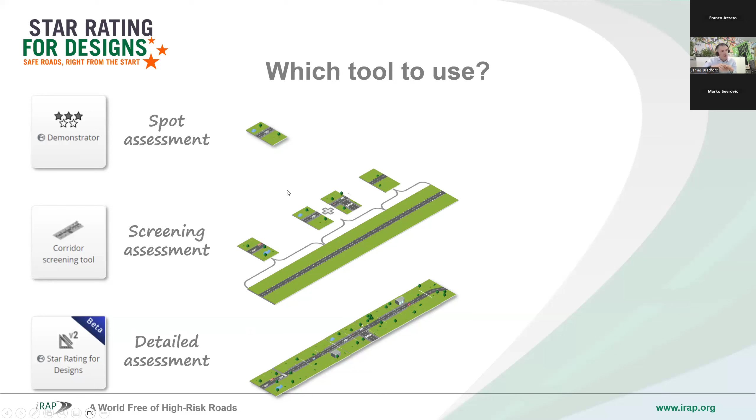It's also worth bearing in mind the level of resolution in the results they provide. The Star Rating for Designs web tool will provide you the full star ratings in detail for every 100 meters, whereas the screening tool or the spot assessment will put them at a broader level. So it'll still give you star ratings, but there'll be a tolerance associated with them.

If you're an advanced user of iRAP, it's fully possible to take an upload file for the before conditions and then generate the changes you're going to make on that, or even build it afresh, all in Excel, and upload that straight to ViDA.

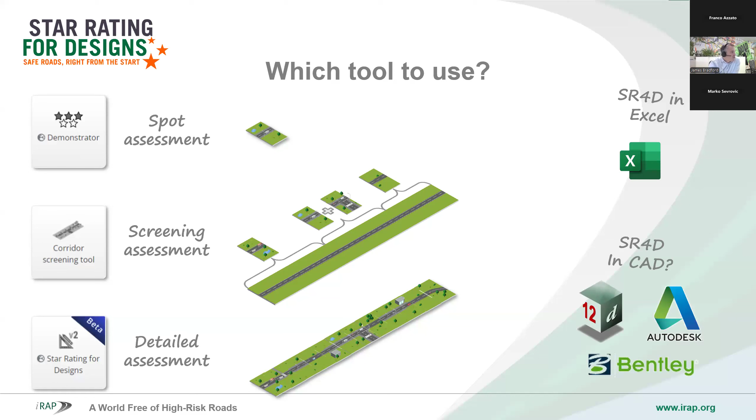And of course, it's worth noting that certainly iRAP, we're working with a number of the core CAD providers for this industry, and working with them to actually try and make sure the Star Rating for Designs is actually built within the CAD software. So as a road designer is going through that, making their choices of how they're going to do their road, it would come back saying, this is what the star rating would be, and this is what your fatality estimation would be.

So let's look at a little bit more detail. For those who are not aware of the Star Rating Demonstrator, it's a tool in ViDA. So as soon as you hit the ViDA dashboard, there's a button there that you can go to it. It allows you to select a starting point if that helps. So you might pick, say, a rural road. You can then look at the road features that have been selected for that rural road and then customize those.

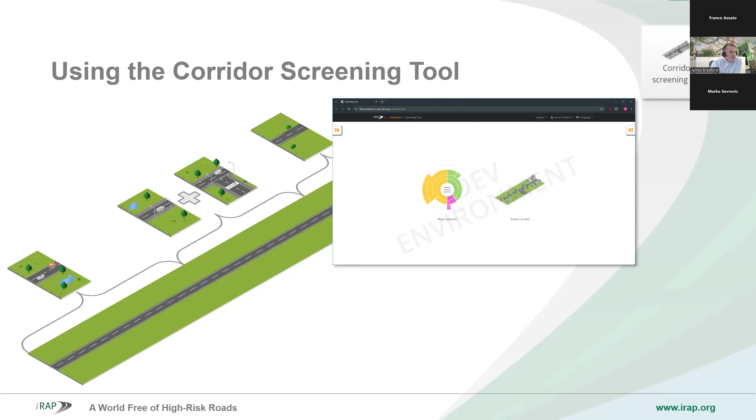So once you open that up, you're allowed to put the information in about your road, so how long it is and what its name is, etc., and what country it's in. It will then create your road. So your road will be going down the page, and then you can put in the subsections of it. So you could pick this first section and say, okay, this is a rural bit, and it's so and so long, and then you can actually define a stereotype. So you'd click on that button there, and it will open up the stereotype, so the coding window for it, and you'll be able to record all of those road features.

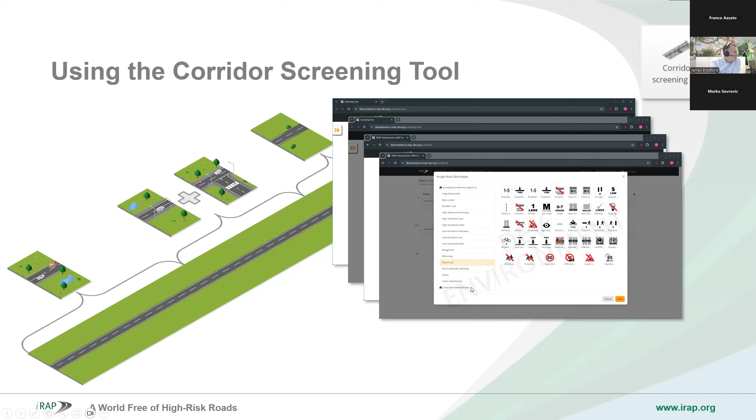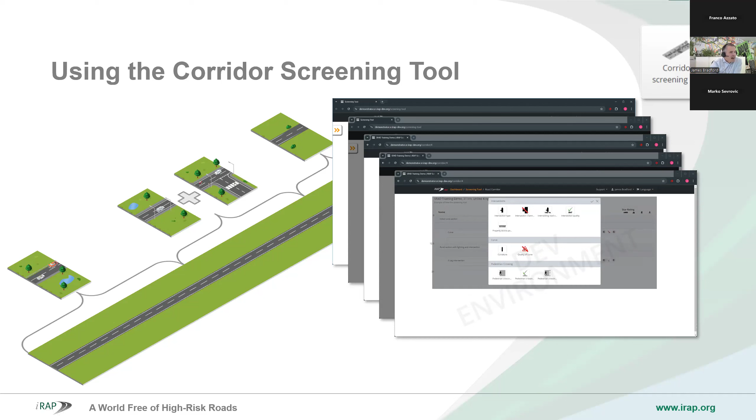Of course, it also allows you to load, if you've previously saved a stereotype or 100 meters in the demonstrator, you can certainly load that up within the screening tool. And what we're aiming to do is build this over time and start incorporating road standards within there. So if you're building it to a certain road standard, you could use that as your starting point. You can then, once you've got all those fixed attributes that are consistent throughout the 100 meters, start building in some of the ones that will vary. So this would be things like intersections. Of course, there won't be an intersection in every 100 meters, curves and property and pedestrian crossings. So you can select for those in there and how frequently they are going to be down the road.

It's like their density. So here you can see I've separated this road into 3 different sections, with this beginning bit being 12 kilometers long, the middle bit being 10 kilometers long with 1 intersection inside it, and then the last bit is 8.5, and it will show you what the road will look like in terms of the star ratings. So this road, I haven't put any pedestrian or bicyclist flow on it, which is why it's just producing that vehicle occupant risk and that motorcycle risk.

The next stage we're also planning to do with this is also put in fatality estimations. So we're just looking at how we can do that. So this is where you can actually stitch multiple hundred meters together to reflect different homogeneous sections.

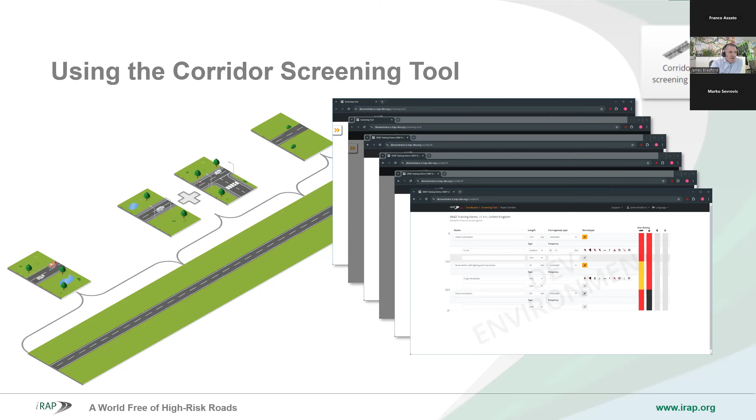And finally, the focus of where we're going to be talking about today is very much on the updated Star Rating for Designs web application. So I'll give you a demonstration of how that can be used and what ways that you could use that. Before we go into that, what I want to do is go through a case study of how Star Rating for Designs, the original web app, had been used already.

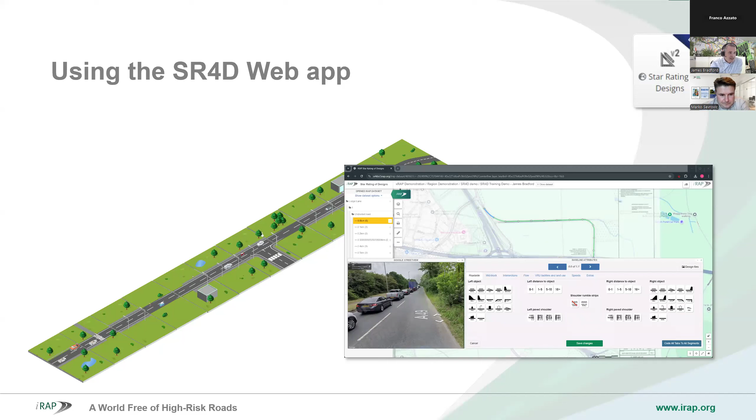So what I'm going to do is pass over to Marko at Era, and he'll talk you through the project they did or they facilitated in Croatia. Perfect. Thank you, James. And I'm requesting remote control for the slides if possible. Yep, you've got it. Yeah, okay.

So I will be talking about one case study of the A8 road, which is a road connecting one major tunnel that we have in Croatia. That was one of the, let's say, most dangerous sections in Croatia. And let me just, sorry, I skipped a slide. So yeah, going back. Perfect.

Okay, so it is a current road that is approximately 12 kilometers in length, and it's a single carriageway, one lane each direction, and it's very heavily used because it connects one of the most prominent areas for tourism in Croatia. And its ADTs in the summer go well above 30,000. So you can imagine with a lot of trucks and everything, there were a lot of crashes, overtaking, even illegal overtakings, and the problems were occurring daily.

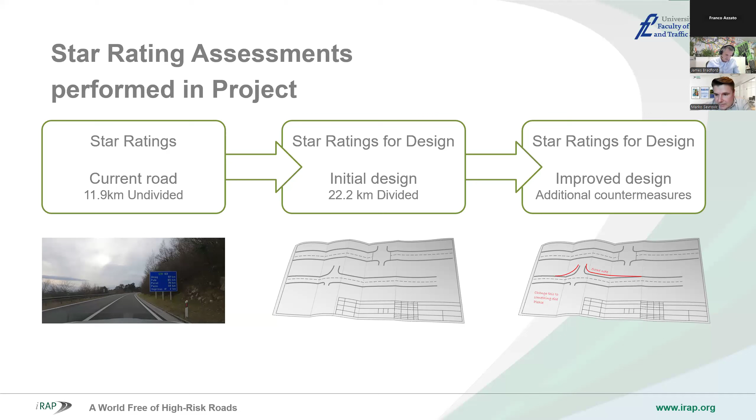So the concessionaire decided to build a second carriageway, of course, having 2 lanes each carriageway, 4 lanes in total. And they did the initial design. And during the road safety audit process, which was mandatory because this is part of the TEN-T network in Croatia, we also implemented the process of star rating for designs and came up with an initial design.

So one of the good things we had here was that we had the iRAP survey before. So that's on the current state, on how the road currently looks. And as you can see here, the danger features of this road really reflect in the star rating. So more than 54% of the road was rated as 1 star only, and another 27% rated as 2 star. So only a small percentage, somewhere around 16%, was above the 3 star benchmark that was set.

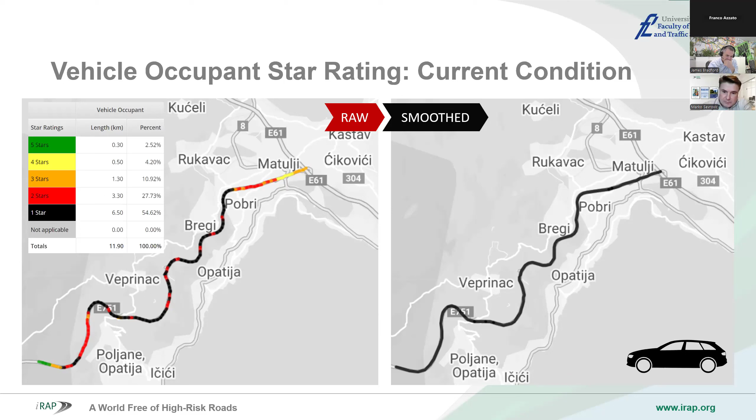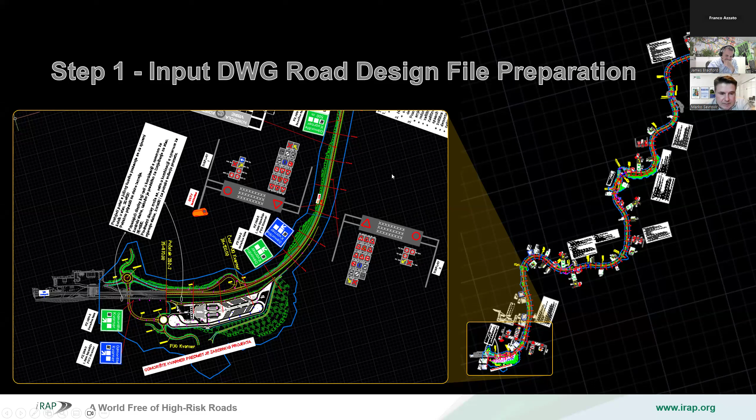And if we look even in the smoothed sections, for those of you who know iRAP, we have the raw and smoothed sections. So the smoothed section actually came up as a 1 star road for the whole section. Having that in mind, we also did the analysis for the motorcycles as well. It's a 1 star, and in the process of the RSA, we got the CAD designs from the designer, which were then assessed in terms of traditional road safety audit, but also with the Star Rating for Designs app.

So how did we do that? As you know, probably some of you are road designers, when you get designs of roads, you get a whole bunch of CAD files which hold different features of the roads. And sometimes what happens is that you don't have a single CAD file that covers all of the aspects of the road that should be assessed in the road safety audit.

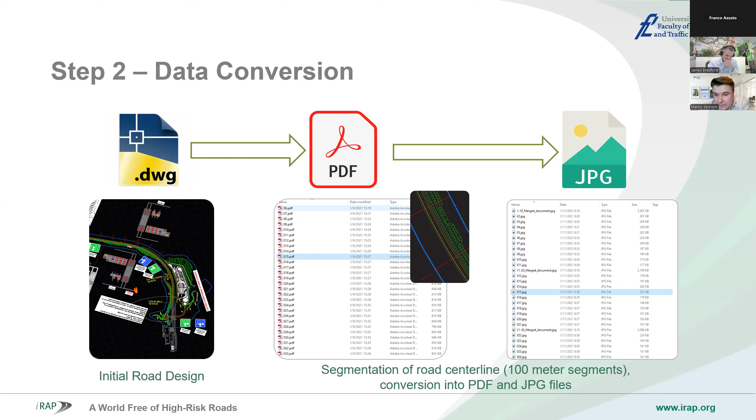So what we did in the first exercise, we actually merged those files together and converted them to PDF and to raster images so that we have the current layout in the raster format. And then these raster formats can easily be uploaded onto the Star Rating for Designs app into respective folders and linked to the center lines that we can later on use to calculate star ratings in ViDA.

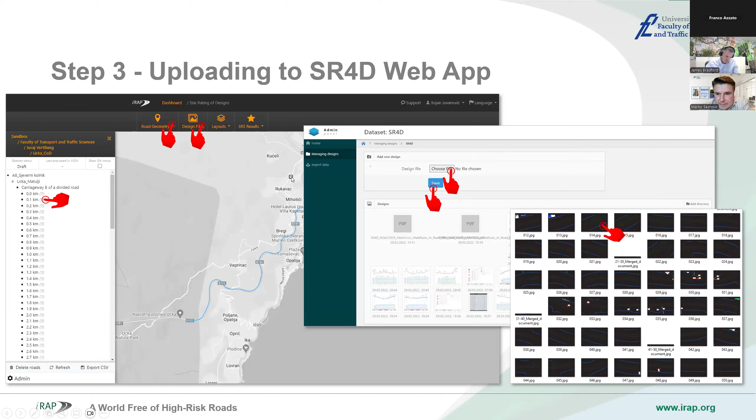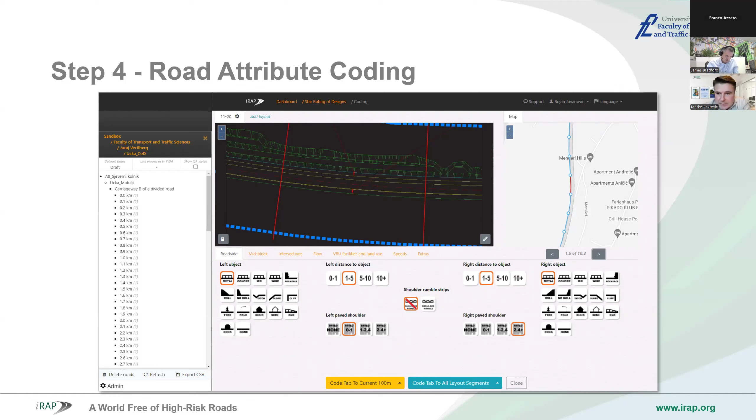Once we have the CAD files, you also link the individual 100-meter sections to a particular location in the CAD file. So the person who is doing the assessment can easily browse through the 100-meter sections, going back and forth, and actually coding the attributes based on the iRAP coding manual and the procedures which are present for calculating the star rating of designs.

So designers usually try to get to the point where they meet all the requirements of the standards, but that does not necessarily mean that the road is absolutely safe. So we can do more than the standards, and that's exactly what we suggested in the following steps.

So the ViDA investment plan came back to us with several recommendations. This is a very hilly terrain. It's very hard to build additional lanes and to fix the curvatures. So we basically selected only the countermeasures that are applicable at the location and tried to do the improvement design based on what we can actually suggest through the RSA process to the designer to amend in the future.

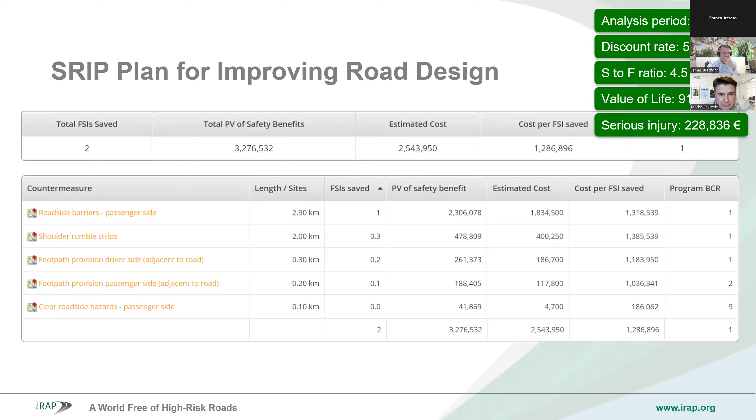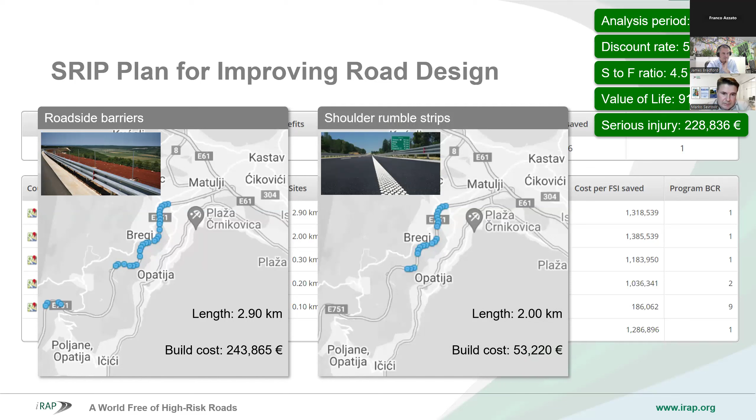And you can see here the screenshot from the Safer Road Investment Plan from ViDA, where we have the recommendations to install 2.9 kilometers of guardrails and other things at the road. So as well as the numbers, as well as the money, we also had the locations where this would actually make an impact in terms of benefits in road safety.

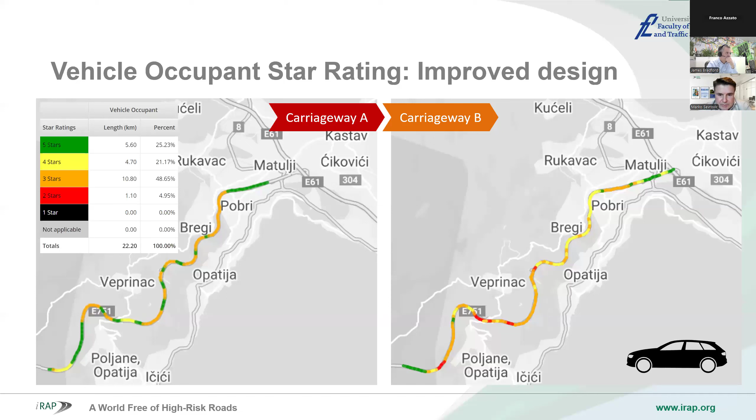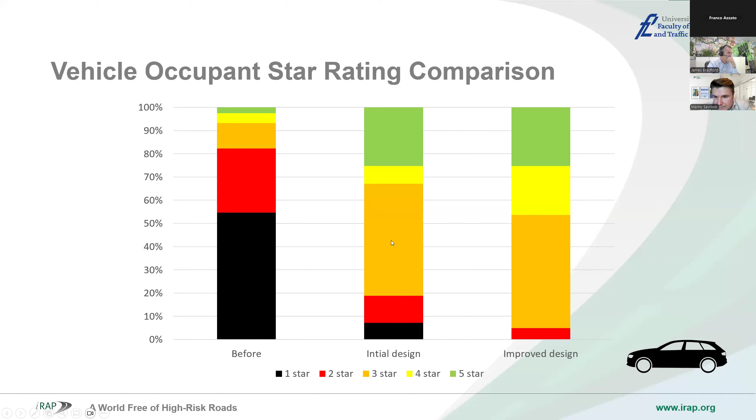And in the end, you can see the comparison on this graph. The left bar is showing the before situation. The middle bar is showing the initial design star ratings, and then the final bar, the right bar, is showing the improved design star ratings, which obviously was a big improvement. And just to say, this road is currently being constructed, and we really hope to see that in the future there will be improvements coming from this. Thank you so much, James.

Back to you. Brilliant. Thank you very, very much, Marko. So in addition to that, unfortunately, we don't have Dominic with us this week. But previously, last week at the ITF World Congress, he was actually able to provide us with another example. So I'll very quickly go through this case study.

So this was an extension to a road that had already, part of it had already been built, but they needed to provide a much longer section to this. And this was over in Western Australia, so a road managed by Main Roads Western Australia. And so what they wanted to do is, because part of it was a greenfield site rather than a redesign, they wanted to go, how can we build that into the process? And likewise, how can they understand the improvements that are happening?

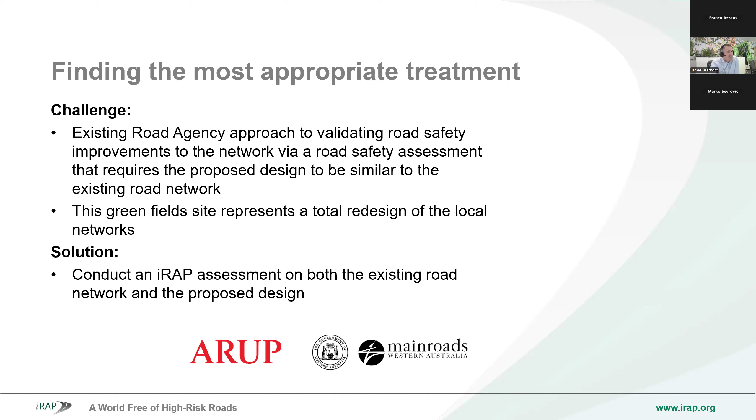And certainly Main Roads Western Australia do a lot with the star ratings. They've already run the biggest AiRAP data collection project in the world so far, and they're certainly finding use for it. So one of the things that Arup did as part of this project is they actually did the star rating for designs of it to understand what the implications would be on the project. So this bit here was a road upgrade, and then this bit was a brand new greenfield.

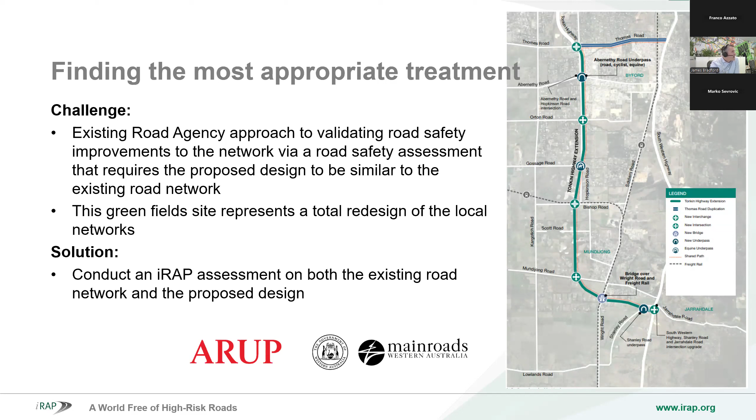But also worth noting, this first bit, some of it, I think, was undivided. So the road actually became a bit longer. So originally, you can see the roads that did previously exist, and they also did the feeder roads onto it. For vehicle occupants, there was a little bit of 4-star and a little bit of 3-star, but the majority of it was 1 and 2-star. And for motorcyclists, a very similar kind of situation.

Once they put their design through and recorded all the road features, it was then coming back out as majority 4-star for vehicle occupants with a few bits of 3-star. And then certainly a similar kind of situation for motorcyclists, but with majority 3-star and a few little bits of 2-star. And that certainly allowed them the ability to then dig into and understand what was going on there for the motorcyclists.

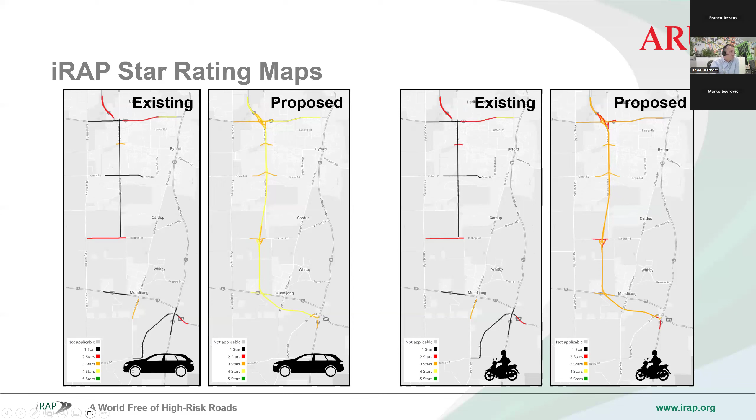Then in a similar situation, the before situation for pedestrians, you can see it was quite a mixed bag. Where they were present, it was reasonably safe in terms of there was some 4 and 5-star and then a few bits of 3-star. But of course, they weren't present on most of the road, and that was certainly one of the requirements of it.

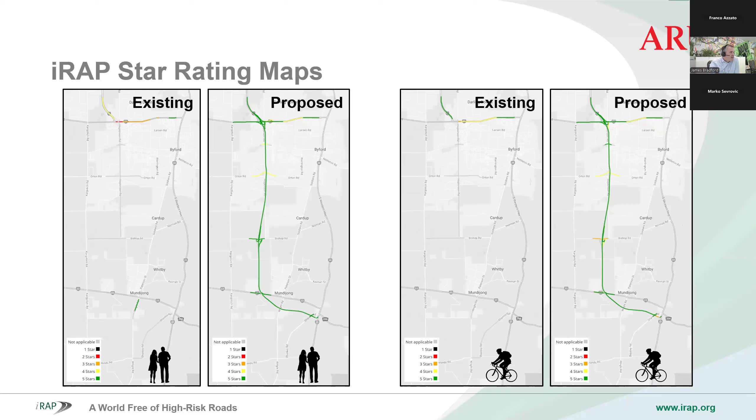And the same kind of position for bicyclists. So once they had run their design through, they were actually able to confirm that the facilities they'd put in there for both bicyclists and pedestrians certainly were appropriate and provided a good step forward in terms of facilities. And in terms of understanding how that impacted the fatal serious injuries, they calibrated the model for the existing road and then looked at what impact it would have afterwards.

And in terms of fatal serious injuries per year on the road, previously it was getting about 4.8 fatal serious injuries every year on average. And it was coming out saying that actually they would be able to reduce that down to 2.4. So a 50% reduction of fatal serious injuries on that upgraded road. But it's worth bearing in mind that road was going from part of it already being an existing road, but part of it being greenfield.

So this is not even giving you the full picture, because that road went from 30 kilometres up to 51 kilometres. So when you take that into account, and you do the fatal serious injuries per kilometre per year, actually that's more like a 70% reduction. So straight away you can see there's a really, really good win there. And a really good way of actually celebrating the impact that the road design is going to be having and the work that the road designers would make.

And so it's along these lines that as iRAP, we think it's really, really important to actually celebrate the road engineers and the work they put into it, because by designing a safe road, you're actually getting an absence of risk and an absence of fatal serious injuries happening. So it's very hard to actually see the tangible outcomes except in the crash data. And this is where the star ratings can be really powerful.

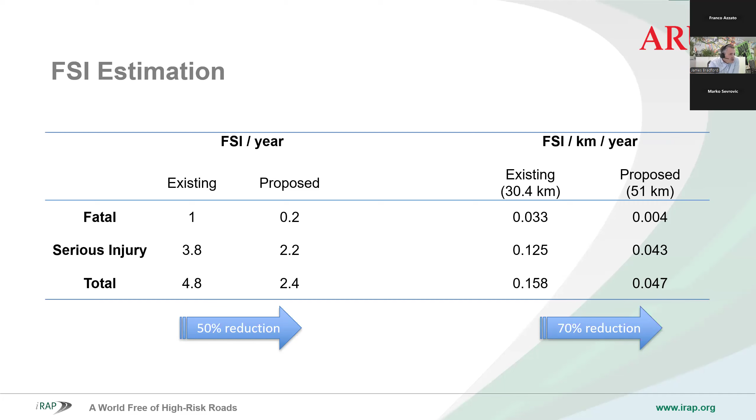And so as part of this work, the actual project was certified by iRAP and a certificate issued to Arup to recognise the work they put into it. But interestingly, when Main Roads Western Australia were told by Arup that the road had been awarded this certificate, Main Roads Western Australia were particularly interested and actually wanted a printed copy to be able to recognise the effort and the good work they'd done on that road.

And so what I'd be saying is, wherever we are making these safer roads around the world as road engineers, what we've got to be doing is actually celebrating them as well. And Star Rating for Designs is one of those perfect ways of doing it.

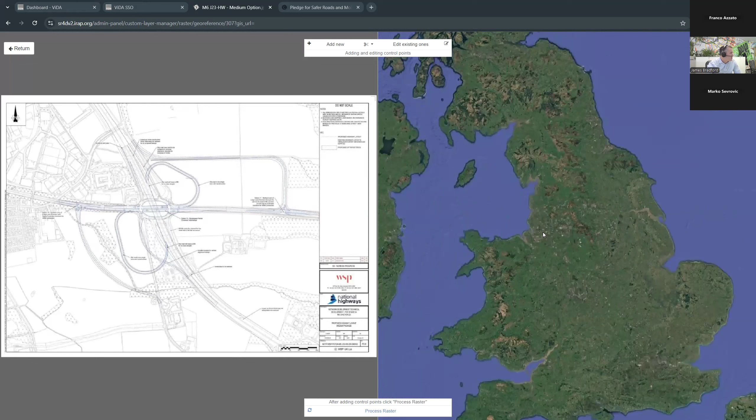So this is where we're actually going to have the design on one side of the screen, and align it with the map on the other. So this is one of the UK motorways near Liverpool. So if we zoom in on it, you can see that it's starting to look very, very similar, where you've got the existing roads here and a few different features that you can see aligning on that.

So what we're going to do is actually connect these together by putting geo points on both of those. So here you can see a building on the design plan, and you can see exactly the same building on the Google Earth map. So we'll click on add a new point, pop it in the middle on both ones. And then we'll find another location.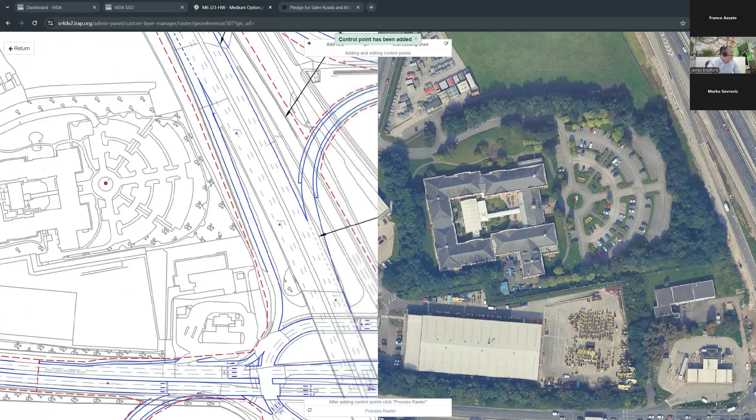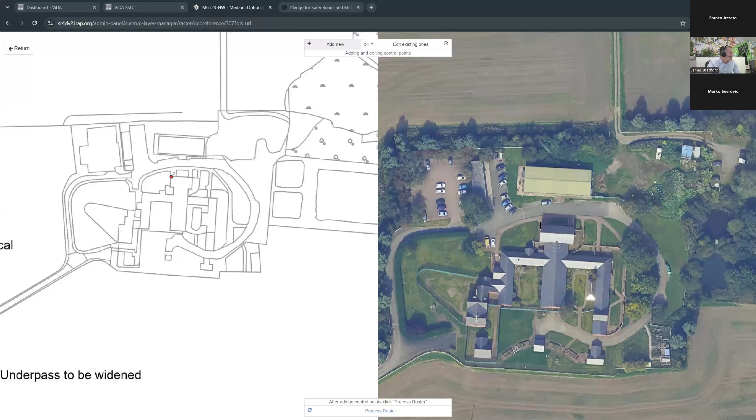So I know that there's some kind of farm over here where the buildings are in both of those. And we can then pick a similar point. So I'll pick the top corner of this one building here. And then click on it here as well. And then I know that there's another one that I can utilize down here. So you'll have to explore your plans to find relevant locations where you can actually join them together. As you can see, their corner here lines up quite nicely with this corner here.

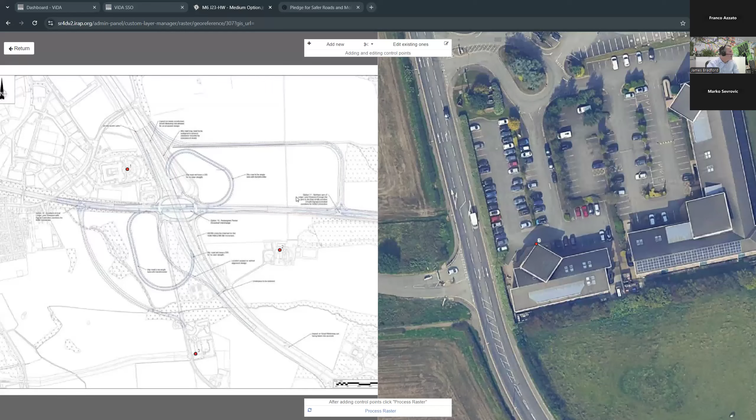So now we've got 3 points, and note that I've been careful to put them as wide apart as possible, and also to try and put them as a triangle. You can put even more points if you want even more accuracy in terms of how it overlays it on the map and how it stretches it to fit. So what this is doing is now looking at those points and working out how it can then stretch those.

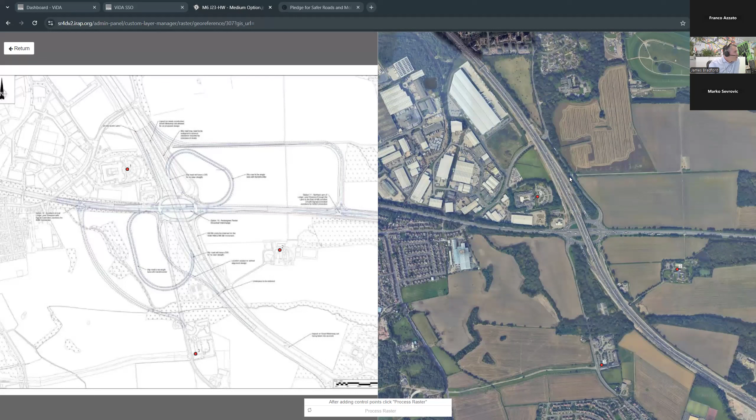So whilst it's doing that, we can see a number of questions coming out. So one of the earlier ones was about Mapillary. So certainly within the Star Rating of Designs web app, as soon as you've uploaded your video data into Mapillary and they've approved it to be visible, it should be visible within the Star Rating of Designs web app. So you'll be able to click on it and see those images you've already collected.

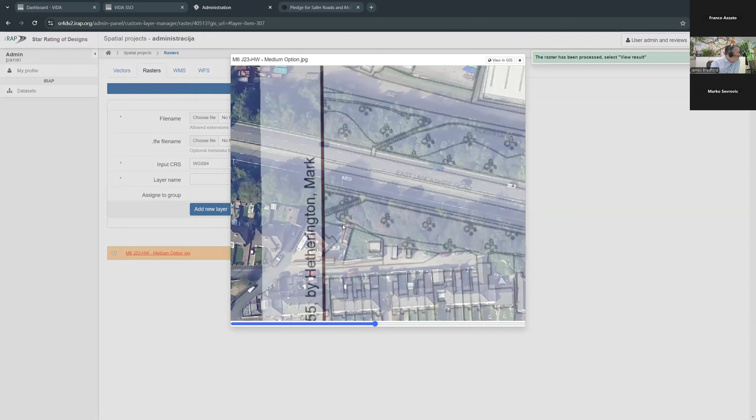So let's see how well we did in terms of overlaying the plan over the map. So this down here, you can make it transparent, so you can be looking at the overlap, and you can be seeing we did a reasonable job in terms of overlaying. It's a few meters out in places, but on the whole, it's fine for this phase of the design process.

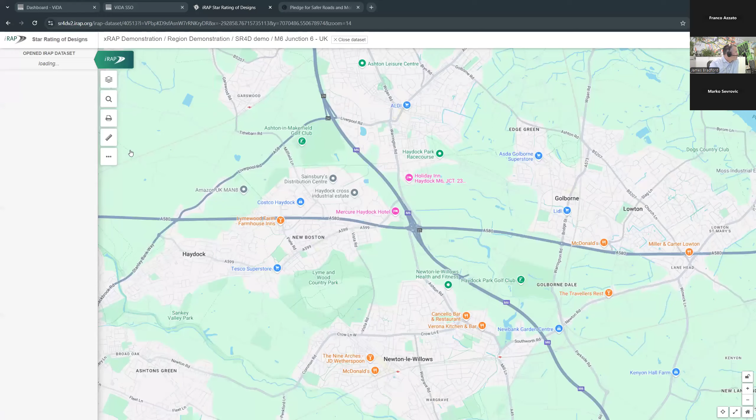So what we're going to do now is go back to the GIS view rather than layers view. And you can see that map has now appeared as a layer. So you can go back to the layers, and then to help give us that little bit of context, we can make that slightly transparent. If you've got multiple different layers, they'll appear down here, and you can select those. And of course, any other kind of layers that you want to utilize, like any of the base layers, whether it's a satellite image or anything else, you can use those as well.

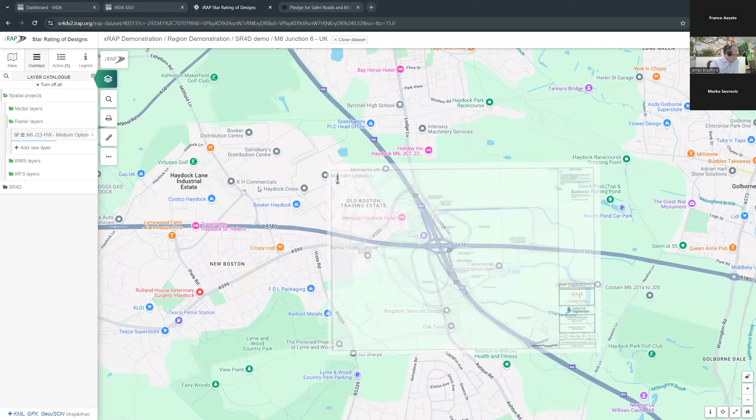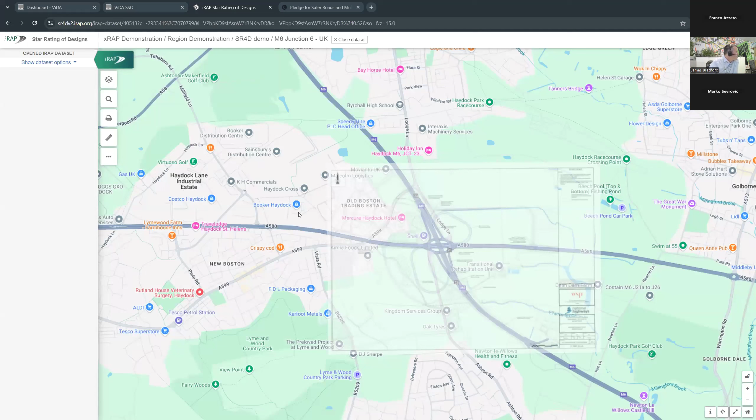So now we've got that in there, what we can do is actually go in there and create our geometry. I'm doing this because, like I said before, we didn't get any geometry with this because it was an early design phase. And we're going to pop it in there for two different roads. One is the Lodge Lane, and the other one is the existing road, the M6. So we'll do that by clicking on Add New Road, Draw a Line.

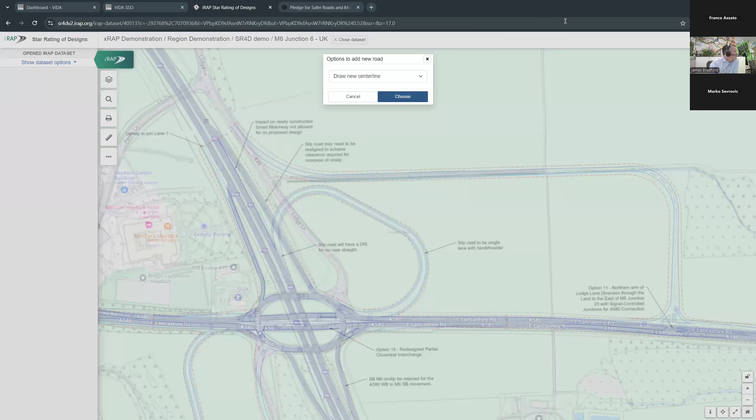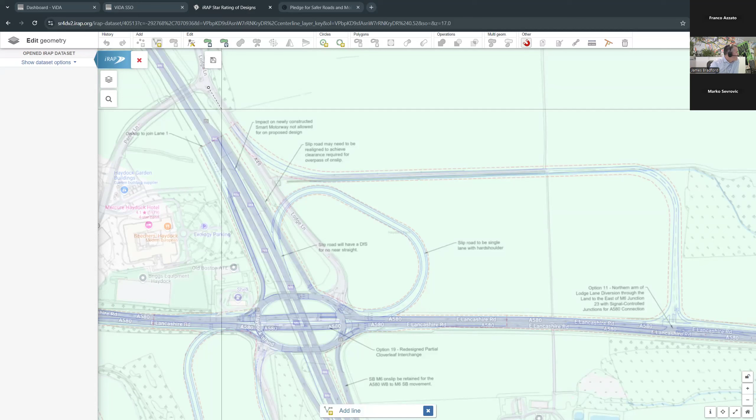That now gives us this toolbar. It should be familiar. It's very similar to a lot of GIS platforms. And we can use that to then add in different road geometry. So here we're going to click on the road. And of course, you could zoom in round corners if you want to get it more accurate. I'm being a bit quick and inaccurate here. If you want to pan and move around the screen, you can do that by pressing the space button and then clicking on the screen and moving around.

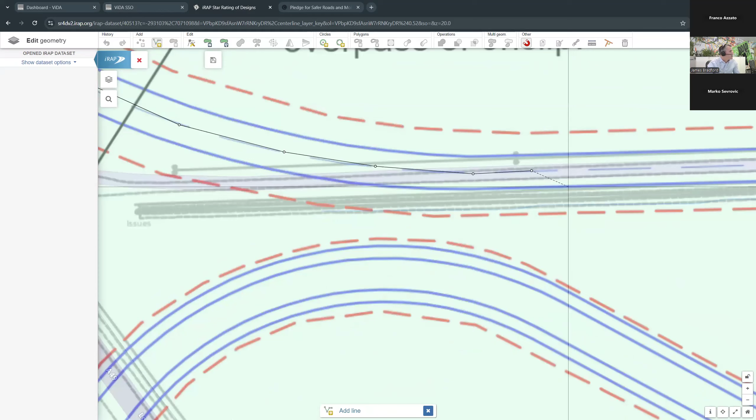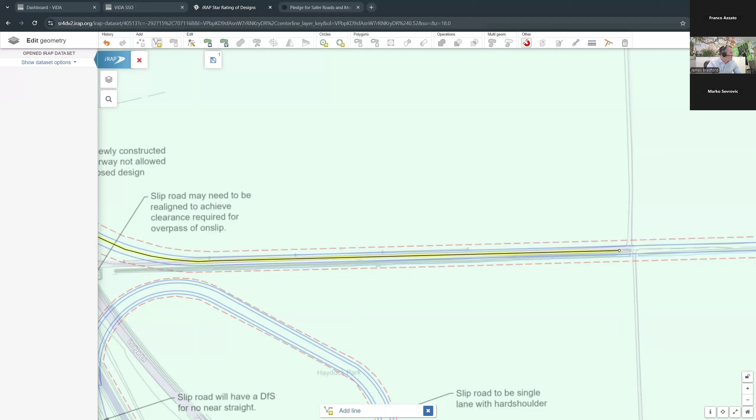And of course, longer straight sections, you can do that. I'm going to stop that line there rather than going all the way around. And to close the lines, you just double click and then we can save that line. What I'll also do is pop in another one for a little bit of the M6 to give you an idea of some of the features. And so that's that one created.

So now that we've created our two bits of geometry, we can close out of the edit geometry feature. And note that you can do other things. So if you got your geometry slightly wrong, there are editing functions in there. There's measurement functions and whatnot. So we're trying to add the toolbox that would certainly help you.

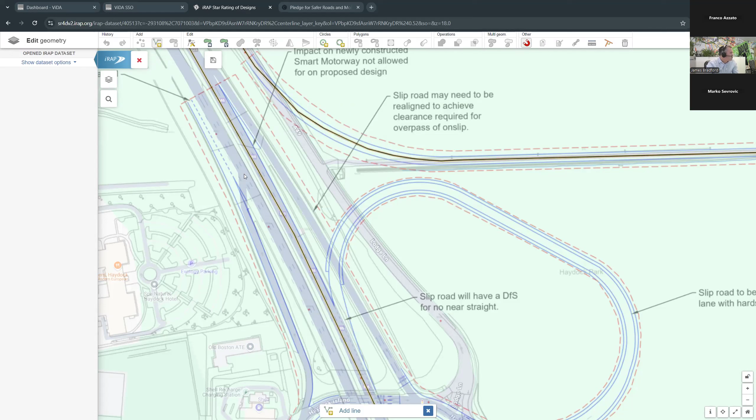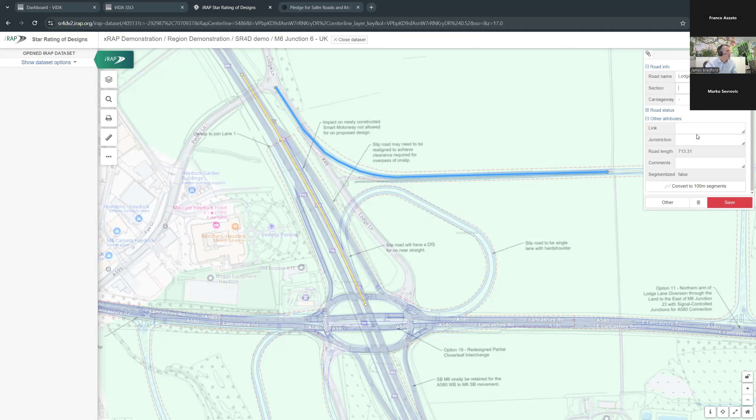Now we've got those two geometries in there, what we want to do is convert them into full roads within the system and then segment them into 100 meters. So to do that, you'll click on the road. It'll bring up the box for you to populate. So this is Lodge Lane. And we'll just have that section 1 and we'll make it undivided. So save that.

And I'll just add those because I've already created them elsewhere in the system, so it's confusing it a bit. So that's in there now, and then we can actually divide that into 100-meter chunks. So we'll say, yep, divide it into 100-meter chunks. And that's going through that process, and you can see it starting to, yep, there it's got the Lodge Lane, the relevant section, and the relevant carriageway in there. Now let's do that for the other road.

So this is the M6. We'll do this just as an example. And we'll do it as southbound example. Note in the UK, we drive on the left side of the road, which is why I've called it southbound. So now we can save that road and then convert it into 100 meters. And you can see whilst I've done that, it's just refreshed the map and you can see those 100 meters that have popped in there for the first example.

The next stage you would go through is actually adding in any other data for any other design files you've got. So you can open up the design files and then if you had cross sections, if you had local zoom-in or anything like that, you can actually add those files into there. So you just use this one example file. And what it'll do is it'll actually associate that image with the relevant sections that you've selected, the 100-meter sections. So you can see here, now we've got one design file associated with it. And so as we were editing that 100 meters, it would make that available.

In this case, because we only have that plan view, we'd have to look at the plan and say, actually, how is the road being constructed? What's it likely to do? Make some assumptions. But of course, as a road designer, you know what you're planning for that road. So it'd be a lot easier to put those in there. If you didn't have those and you're somebody coming out separately and wanting to know, well, what should I code it as? Often if it's joining onto another road, that can be used as your cross-reference for it.

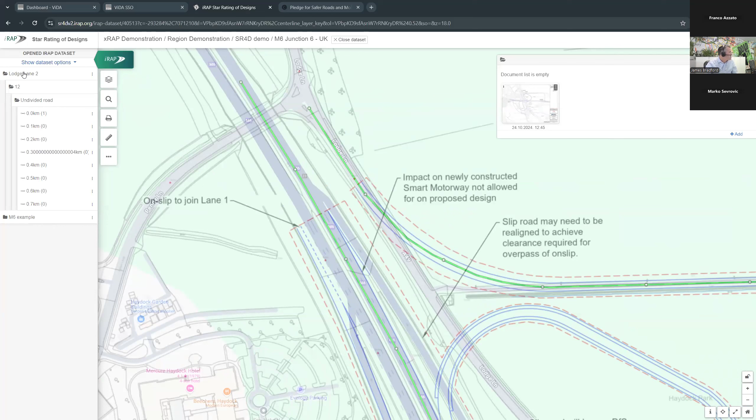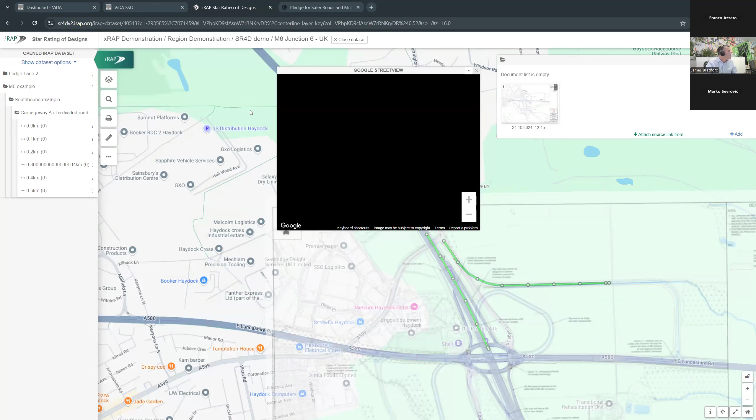And the way we can do this, so I'll do this on the M6, is you can see what's already there by pulling up the Google Street View imagery for that relevant location. At the moment, I know that it's not working properly for this 100 meters that I've just selected. But the nice thing is you can also open up Mapillary. So when you click on that, it shows you all the different routes that people have driven down the road with Mapillary data. And then you can select the one that's relevant. So we'll select this one.

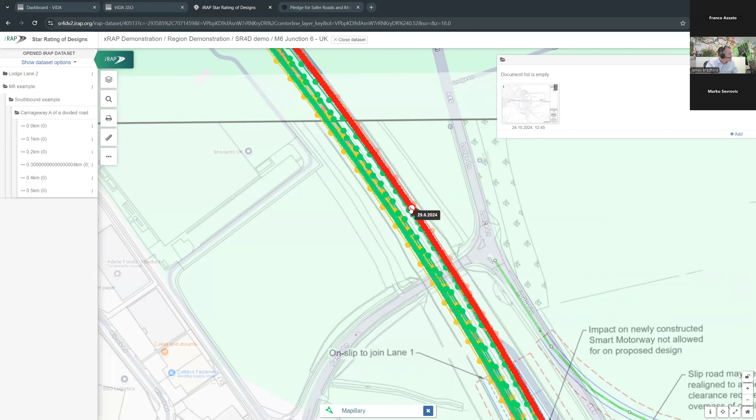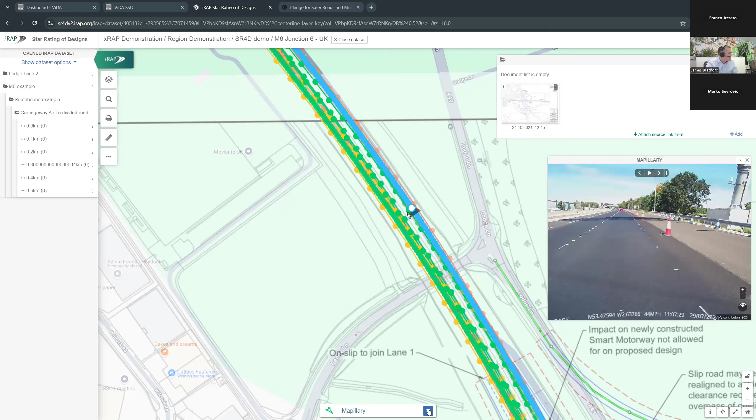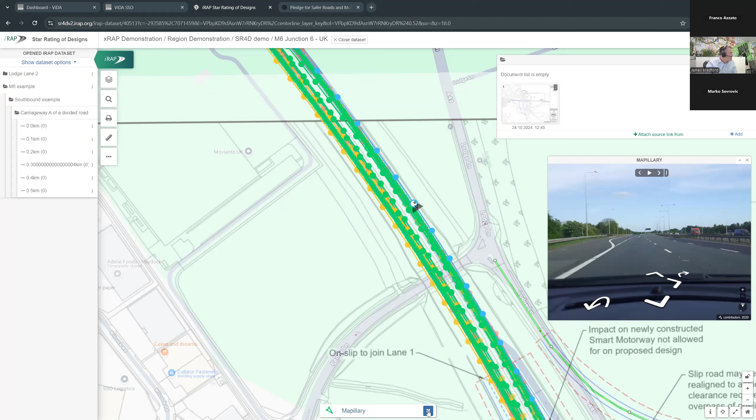And it'll open up the relevant Mapillary file. And so you can see that one there. In this case, it's actually the camera going backwards. So what you might want to go is, well, should we select a different route? Maybe this one will give us a better image. If you've uploaded your data, it will be visible. So I'm going to now hide these Mapillary lines so I can see the plan a lot better.

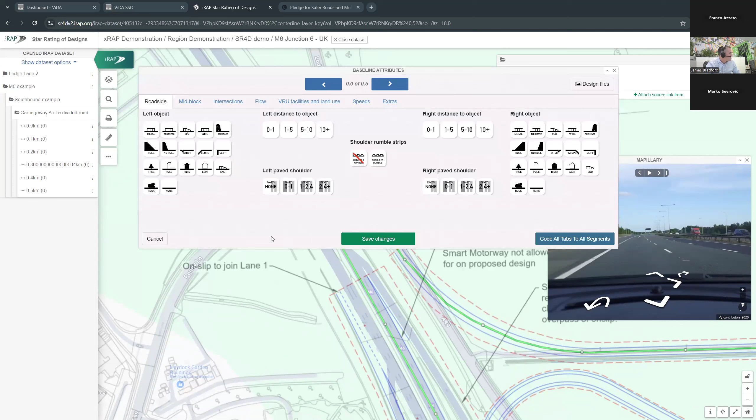You could then go down that road recording the relevant road features for each 100 meters. What we'd recommend that you do is actually record what I'd call a default set of attributes for the whole road section. You might go down there saying, typically this road is 3 lanes. Typically this road has a paved shoulder.

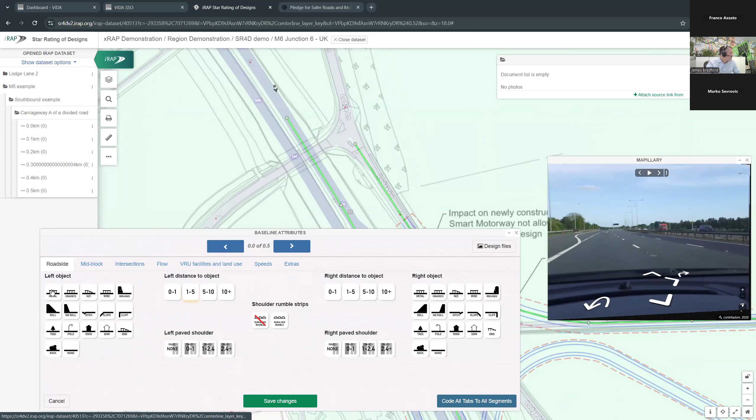So you can see that on the one going the other direction. Likewise, it's got lighting columns. So you'd put all those relevant features in there.

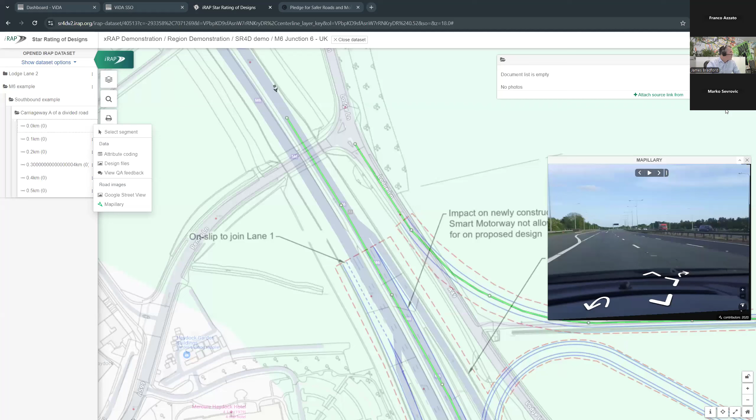And of course, don't do live demonstrations because they never work as well as you'd hope them to.

There we go. So you'd put in those relevant features within there, clicking all the buttons that were appropriate across all of the different tabs. And then once you'd made those changes, those buttons will be highlighted with orange rings around them. You'd then code all of these tabs to all of the 100-meter segments.

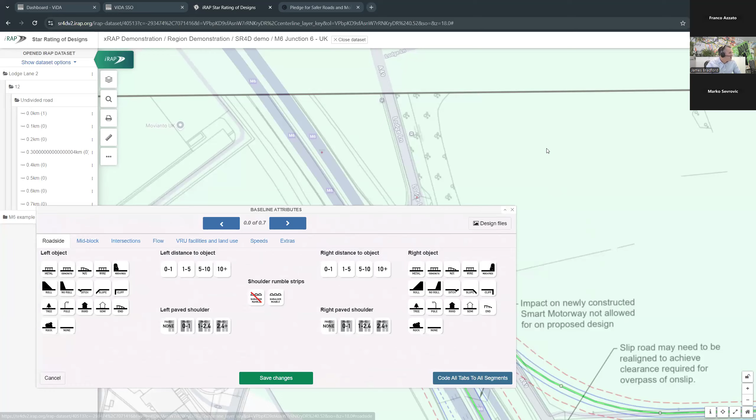So this has given you that base you can work from rather than having to put in every single attribute, every single 100 meters. And then you can go back to the beginning of the road and start putting in the changes. So like this 100 meters here and this one here, you might go in and say, well, I can clearly see there's curvature there. So I'm going to record that.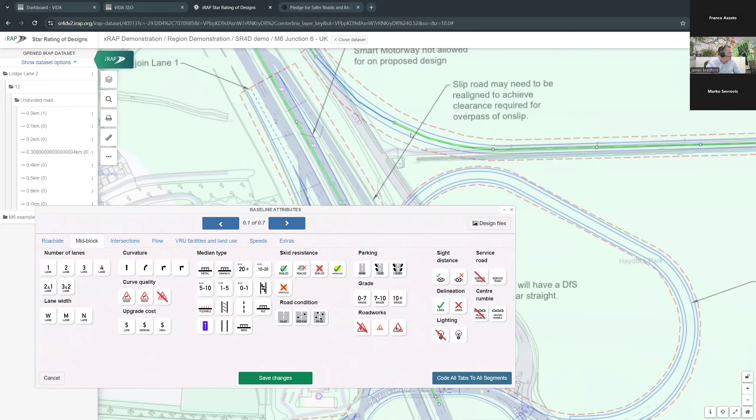So you go down to that 100 meters, record that relevant thing and then save those changes. And you go through that whole process, recording again and again any changes that you're seeing. Once you've got to the end of recording all the road features, you can then go back up to the top and submit your data for quality assurance if you're happy with it.

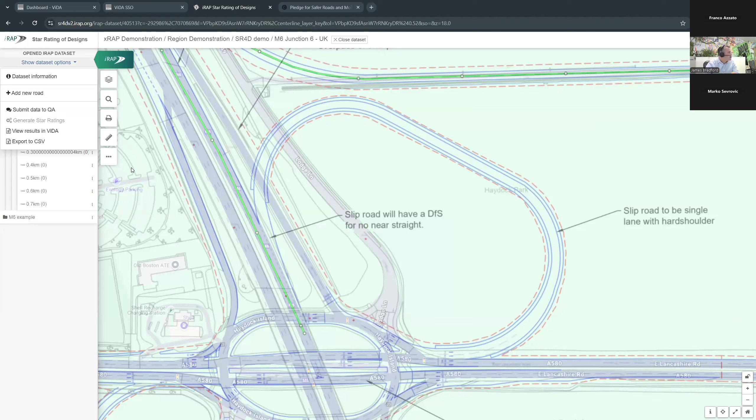It's not currently enabled, but we'll also allow you to generate those star ratings even if it hasn't been quality assured. At the moment, it needs to be quality assured, but in due course that will be available, like provisional ones. So even if there are errors in the data, it gives you that early quick look and gives you that hint that maybe you have coded something wrong if it's not a result that you were expecting.

So you can submit that data for quality assurance. Somebody will go through it, look at it carefully and say, is this appropriate? Is this the right coding? And then after that, you'll be able to generate the star ratings and view the results in VIDA.

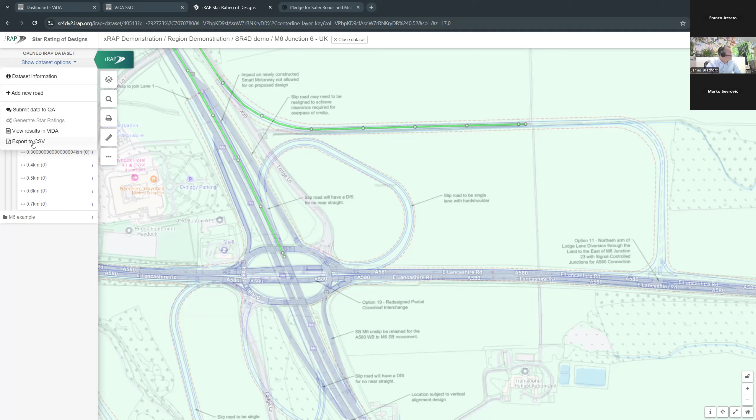In the meantime, until we've got that changed, what you can also do is export the data to CSV. It'll just create you an upload file for VIDA, so you can correct any mistakes that you've made in that Excel file, and then upload that straight into VIDA. And then the situation will be very similar to what you've seen in some of the other webinars that we've done.

You'll be able to go into the results page within VIDA, and it will show you that data set and the relevant star ratings for it. So you'll be able to click on results. Now, bear in mind, this is going to bring up a different road section because, of course, I haven't gone through the full process for that plan. But you'd be able to see that road and what the relevant star ratings are.

So these are the 100-meter star ratings. And you'd be able to look at it for that. If you'd calibrated the data set, you'd also be able to look at the fatality estimations. And if you provided the countermeasure costs, you'd also look at what countermeasures the Safe Roads Investment Plan is suggesting might be appropriate on that road.

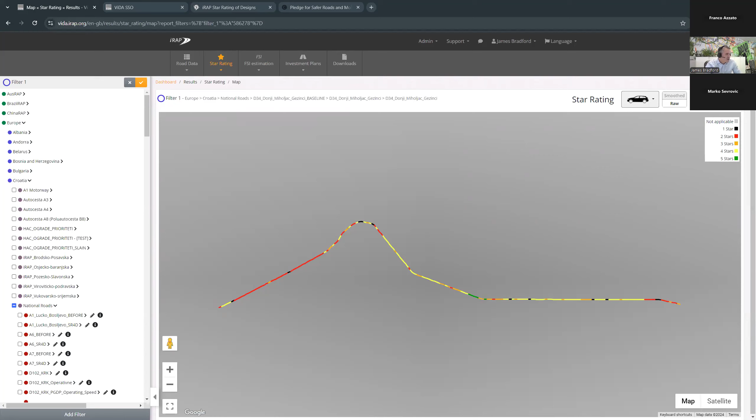So that's where I wanted to get you to today, a very quick demonstration of what's possible with the Star Rating for Designs web app. What I'd encourage all of you to do is to go in there and have a play. Remember that we've got these different levels of tools.

So if you're brand new to iRAP and star rating, it's probably best to start with a demonstrator to help you understand how the model works and the interactions with it, and cross-check that with your understanding of road safety as well. And then when the screening tool is available, utilize that as your quick pass over it.

And then when you've got that detailed design available, then jump into actually collecting that data within the web app. Feel free to start using that web app. It's now available in there, and certainly let us know any further feedback that you have on that. What we will be doing is making some further updates and putting in further languages to it over time, so that you'll be able to go in there and look at it in your local language.